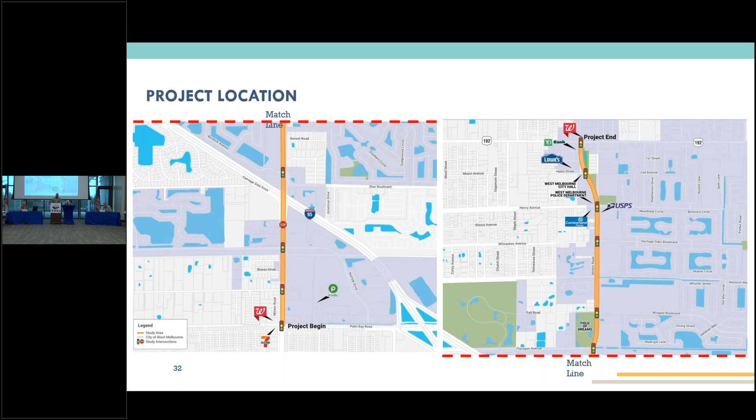We looked at Minton Road, a 4-lane section from Palm Bay Road up to US 192. It's in the city of West Melbourne, and Brevard County is the maintaining jurisdiction of the roadway. We looked at that corridor, and as you'll see, we have a few signals along the corridor that we looked at as part of the study. I'll talk about the intersection improvements we did at those here in a few slides.

The overall goals of the study: the first was to assess the need and feasibility of widening from 4 to 6 lanes. For anyone that's driven this section of roadway, it's 4 lanes, and there's a lot of right-of-way out there today — they had the foresight to get that right-of-way for a potential 6-lane widening in the future. We looked at traffic operations and future volumes, and we're really on that threshold in the future year of that 4 to 6 lane need. So if we did spend tens of millions of dollars widening the road, we'd probably have an overcapacity facility, so the decision was made not to explore widening as part of this study.

Traffic was part of that decision. There were also visioning efforts that had been done — the city had a couple areas with potential town center visions, and we didn't think a 6-lane corridor would fit that pedestrian, multimodal, bicycle kind of corridor and town center feel. So there were a couple different reasons why we didn't explore widening to 6 lanes along the corridor.

Instead, we focused on intersection improvements — we really hit those hard, wanting to address existing and future congestion and safety issues along the corridor, in addition to incorporating and enhancing our multimodal facilities for pedestrians, bicyclists, and transit.

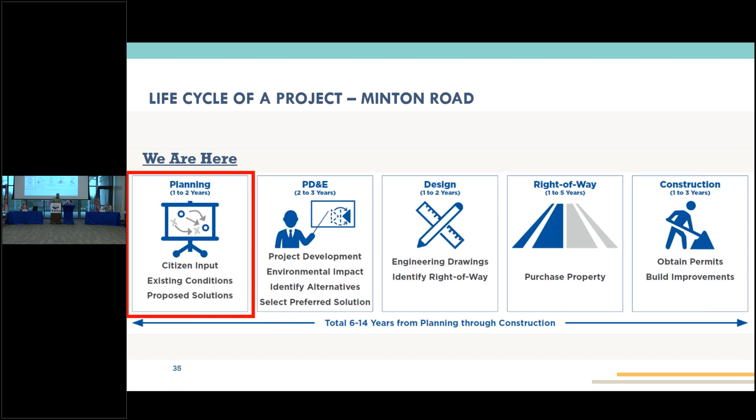Taking a step back — where are we at in the development of this project? As you'll see by this little red box, we're at the very beginning stages, in those planning stages, kind of the end of the beginning stage I'd say. We have a few different stages to go; we don't think we'll need PD&E for the recommended improvements we're presenting today, but there will be design, potentially right-of-way, and some construction that will take place, and we're going to need funding for all of those phases.

Before we jump into what the recommended alternative is, I wanted to give a snapshot of what's out there today. It's a 4-lane road. We have 12-foot lanes today, a 4-foot paved shoulder to the outside, then a swale grass area outside the travel lanes, and about a 5-foot wide sidewalk that's really at the right-of-way line.

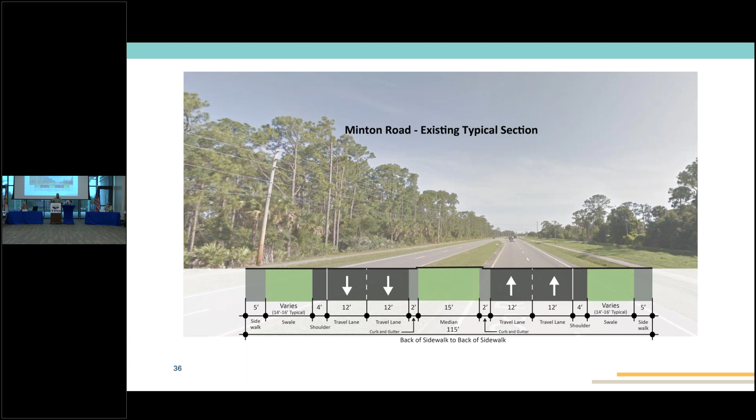For our preferred roadway alternative, we went with a shared use paths alternative. This got 34% of the vote from our August public meeting, the highest percentage, with the next highest in the low 20s. What this really does is focus on the multimodal pedestrian and bicycle atmosphere and environment.

We're taking those 5-foot sidewalks that are out there today and widening them to 12 feet wide. We still maintain the swale, and we're hoping to do some landscaping in it to enhance the environment. We're also looking at reducing the travel lanes down to 11 feet and putting in a curb and gutter to the outside, really trying to help with speed management.

For anybody who's driven it, especially during non-peak hours when there's not much congestion, you can go 50, 55, 60 pretty easily. We're hoping to get those speeds back down closer to the posted speed limit of 45 miles an hour.

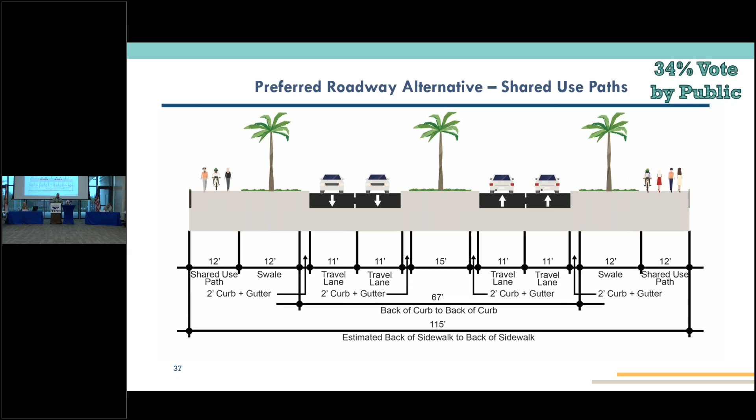I'm not going to go through each intersection—if you have any specific questions, let me know at the end. But as a highlight, we looked at turn lane improvements at Hield Road, Norfolk, Carriage Gate Drive, Eber Boulevard, Milwaukee and Heritage Oaks Boulevard, and Henry.

What we're seeing is that 4 of those 6 intersections were operating at level of service E or F during at least one of our peak hours. Like with school grades, A is great, F is bad, so we don't want to be in the Fs, we want to be in the A, B, C range. We're seeing that if we don't do anything, we're hurting out there—we've got some pretty big issues.

With the improvements we went through as part of the study, only one intersection was operating at level of service E in one of those peak hours, where previously it was operating at level of service F. We're seeing a pretty significant delay benefit even though it's still level of service E. Overall, we're seeing travel time reductions between 9 and 28%. If we drove the corridor from Palm Bay Road to US 192, we'd see about a 30% reduction in one of those peak hours in the direction of travel.

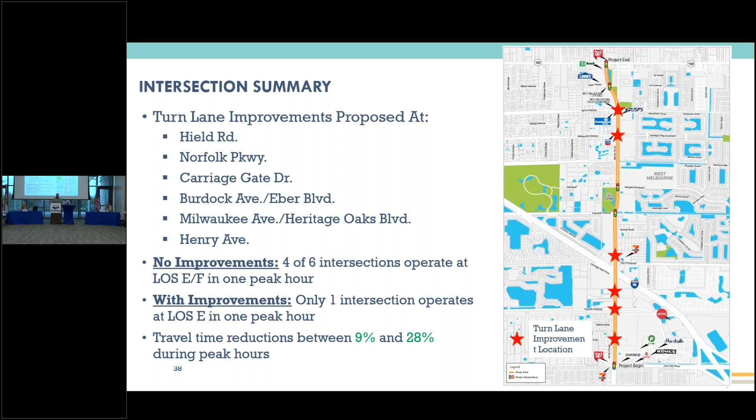To show just a sample of what we look at—I'm not going to hone in on the details—this is just Milwaukee and Heritage Oaks. We go through a pretty rigorous process of looking at different concepts for these alternatives that we present to the public.

This was the preferred alternative. We looked to add some turn lanes along the side streets. Minton Road is what looks like it's east-west here, but north is to the right, and we go through and develop this concept.

We look at potential right-of-way impacts, which fortunately at this intersection we don't have any. All the orange is some of the new pavement, and you'll see the pink is the new shared use path and how that ties into the intersection—so looking at how things interact to enhance and improve each specific intersection location.

So with that being said, next steps: the draft report is currently in the TPO's hands. They're reviewing that, and we're hoping to get it published over the next 60 days. Like I mentioned before, we do need design, right-of-way, and construction funding. Right now we have no funding for those next steps, but we're hoping that the City of West Melbourne and Brevard County can get together, come to some type of funding agreement, and get funds secured for this project moving forward.

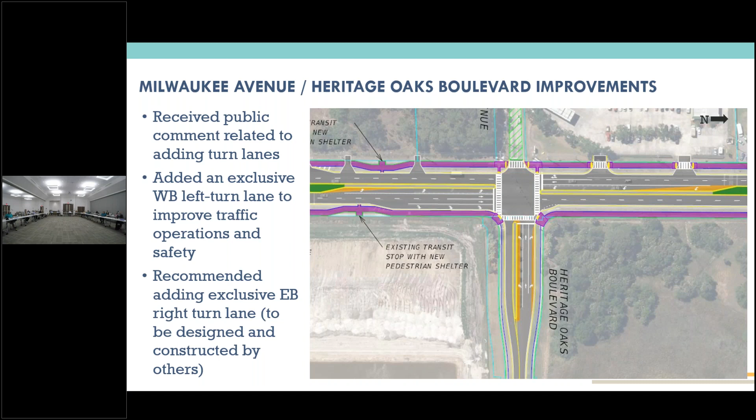Travis, I have one concern. You have one intersection which, after these proposed improvements, goes from level of service F to level of service E during peak hours. By the time this project is actually put into effect, there's a good chance that intersection will go from level of service F and just stay at F, rather than this being a long-term solution. When we look at any project, we're looking out to 2045 for all of our traffic volume, so all of the with improvement numbers are based on 2045 traffic volume. Hopefully if this gets built—and the approach in question is the eastbound approach at Norfolk, which is currently under design by the City of West Melbourne to add a second left turn lane—that's probably going to be one of the first improvements to come out of this. So we expect that to be level of service E out to 2045, so based on our models we should be good.

Okay, any other questions for Travis? All right, thank you, perfect.

I appreciate it. I do have a comment regarding utility relocation. If utilities are in the right of way, they're moved at no cost to the project, because the utility companies use the right of way for free—they don't have to buy land. So when it comes to moving the utilities, the expense is on them. As a matter of fact, there's even a state statute that says if the utility company does not move the utility in a timely fashion, the local jurisdiction can move the utility and back charge the company for the moving. So utilities should never be an issue if they're in the right of way. If they're not in the right of way and you want to move them, then they are a big issue.

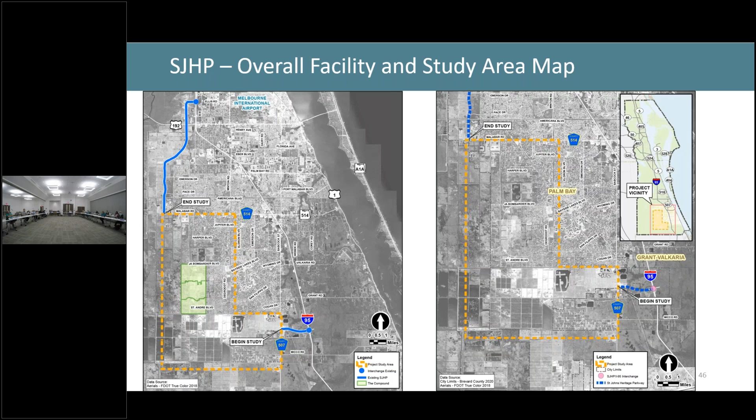If I could shift your attention to the left-hand side of your screen, at the top you can see the first of two existing segments of the St. John's Heritage Parkway. The first goes from Malabar Road north to the I-95 Ellis Road interchange. Then at the bottom of the screen, starting at Babcock Street out to the I-95 St. John's Heritage Parkway interchange, is the second existing segment. So let's shift to the right-hand side of your screen—as you can see, the terminus at Malabar Road and Babcock Street really defined our study area. The first part of the study involved extensive resource mapping of the natural, social, cultural, and physical environments, and working with landowners to come up with the corridors we'll show you here in just a minute. There's been a lot of effort put into evaluating the baseline conditions of the study area in order to come up with what we call windows of opportunity, to connect the dots, so to speak.

So what is an alternative corridor evaluation process? It's a corridor planning study—a process that the DOT came up with, essentially to evaluate new corridors, or what are often called greenfield corridors. A big part of this is establishing the project's purpose and need, and in this case, the first one being systems linkage. Systems linkage just means we're looking to connect points A and B and fill in the disjointed section of the St. John's Heritage Parkway. Certainly economic development plays a key role in a transportation project, and we looked at the traffic out to 2045—approximately 9,200 cars would use this segment of the parkway on a daily basis.

So we propose improvements to address the project need, meaning we develop our corridors. We identify the impacts of those corridors. We also evaluate engineering feasibility. Even though we're at a high level planning stage, we want to make sure that what we're developing can be carried forward and is technically sound. There's a lot of public involvement and agency coordination, part of why I'm here today. We do anticipate a completion date of, at this point, probably mid-2022. And it's important to note that the next phase, project development, the PD&E study phase, is not currently funded.

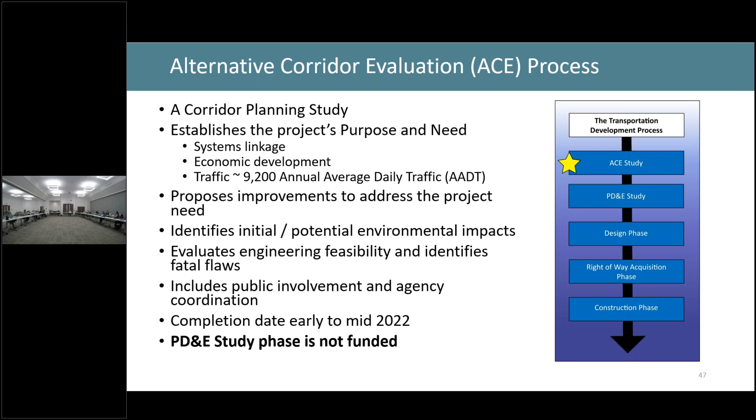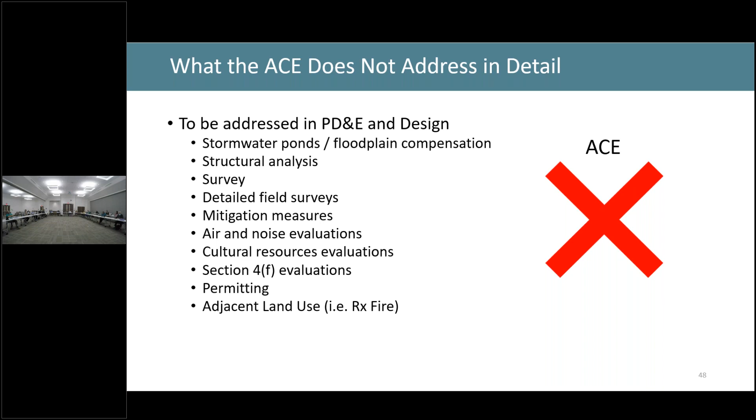So a little bit more about the ACE process. What you're seeing here is items you'd normally see conducted in a PD&E study or in a final design phase. Our charge is more of a geographic information systems desktop analysis, and really our charge is to develop up to 2 to 3 corridors that can be carried forward into the PD&E study process. So normally, you see this list of items and you think this is what we're going to do as part of this study, but we're doing more of a higher level, planning level analysis in order to identify viable corridors. That's really what our charge is.

One of the big things we did as part of this project is, because ultimately the parkway is envisioned to go from I-95 St. John's Heritage Parkway interchange up to I-95 at Ellis Road, is a look at the land use and how it affects the St. John's Heritage Parkway and how the St. John's Heritage Parkway affects land use. So we built upon some great work the TPO did as part of their 2040 long-range transportation plan and looked at various development scenarios throughout the region to see how that would affect transportation. We do have a meeting with our subgroup next week to present the results of that analysis.

Again, public involvement and agency coordination has been a big part of what we've been doing. Early on in the study, we formed a working group comprised of property owners, homeowners associations, and non-governmental agencies such as the Audubon Society and the Sierra Club. We've also had a lot of meetings with local, state, regional, and federal agencies because as part of this process, they're going to be evaluating the corridors with us in tandem.

And at this point, I'll go ahead and review the corridors that we have. We have 5 initial corridors. Each corridor at this point is 300 feet in width. We take a more conservative approach at the planning level phase in order to give us some leeway as we advance, if we need to shift an alignment or avoid a fatal flaw such as a caracara nest, something along those lines, that we have the, quote, wiggle room to do that.

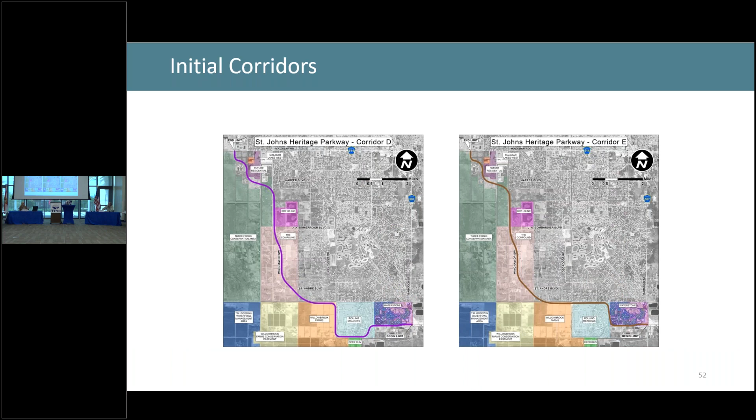Mr. Chair, if I may just say a couple things. This ACE study is really an important first step for this project to potentially come to fruition one day.

We really do need to identify a corridor and preserve the right of way. The city will also review potential developer projects that may possibly help this project come to fruition in sections. But just for a reality check, even though the TPO paid for the study, this is you don't know what you don't know. This was important to go through this process, and clearly there's a lot more work to do.

But we do not have this project as cost feasible in the TPO's long-range transportation plan. In other words, the anticipated revenue when we build our long-range plan over the next 25 years, the funding is not there to program the PD&E phase, the design phase, the right-of-way, or the construction. So, if it was easy, it would have already been done.

We're going to have to definitely, the city is going to have to really work with the developers to see how we can move forward to actually build this project. But as Jesse said, the St. John's Heritage Parkway, this project's been going on for 25, 30 years. So really good work, and this is an important step, but funding is going to be a challenge.

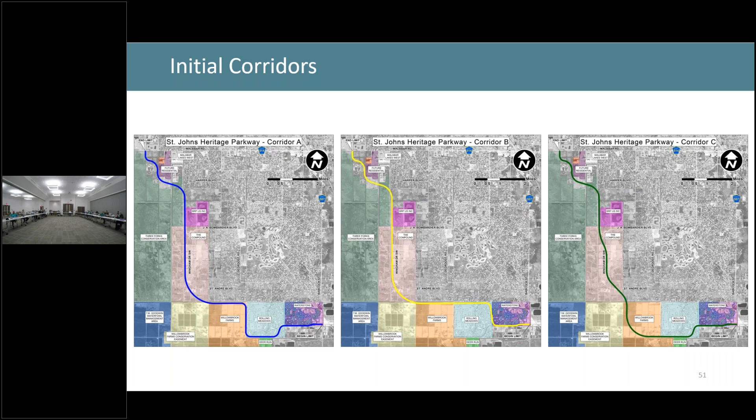Okay, any other comments or questions?